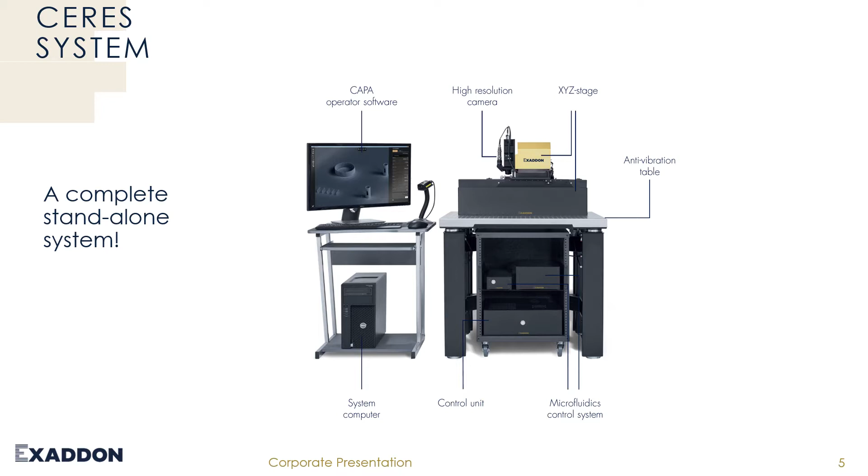We have the microfluidic control system and control unit underneath, which controls the printer, and we have a system computer and a proprietary developed software, which I will explain on later pages.

This cantilever is mounted on a plastic holder, a white square in the middle, and it ends up in a reservoir. The reservoir is the place where you put in the liquid you want to dispense. The reservoir is then mounted to a tubing system coming from the left side. When you apply air pressure on the tubing system, the pressure pushes the liquid through the channels, all the way through the cantilever to the aperture of the pyramid on the bottom part.

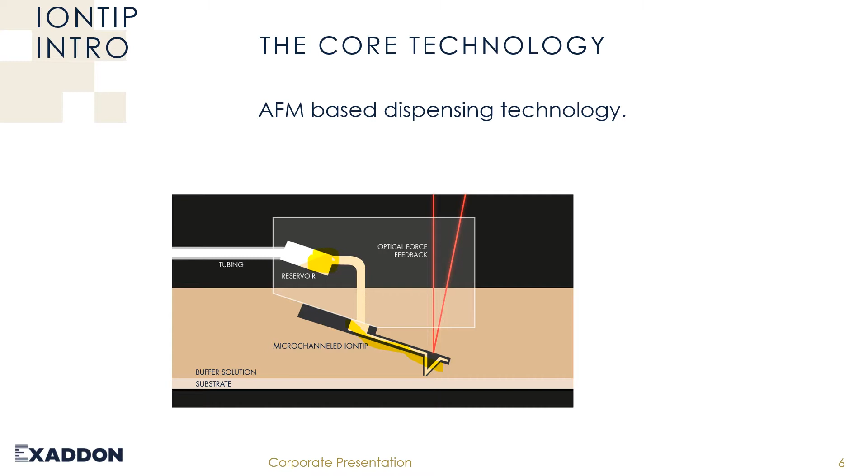So this is the micro dispensing core part of our technology. In the pictures, in the middle, there's a pyramid - this is how the aperture looks. There's an opening of 300 nanometers, a tiny small opening, which allows deposition of liquids in femtoliters per second. A femtoliter per second is about 1,000,000 times smaller than what the best flow sensor can detect.

So it's really small. In the top slide you see how the cantilever looks from a top angle, and in the lower picture is a schematic of the pyramid.

This one is how it looks in real, so it's a consumable, we call it iontip. Everything on the printer is built around this iontip basically.

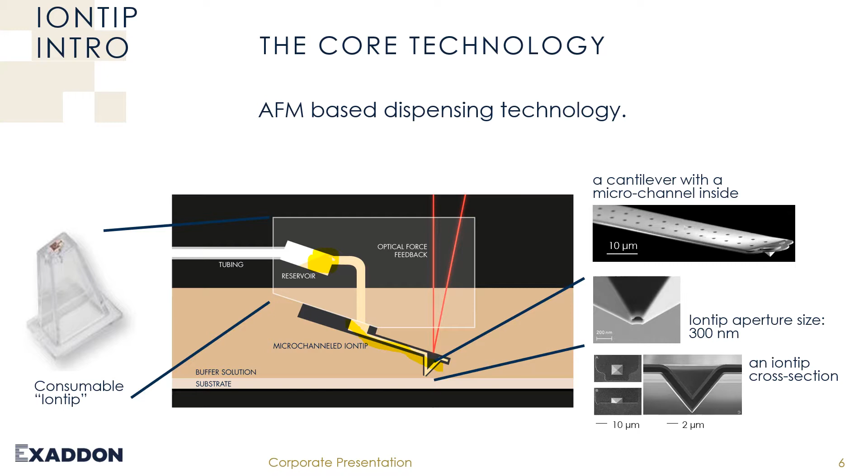Let's move on a little bit to the printing process. So here we see the electrochemical cell, so how we print, so what is the process behind.

Again, there's a cantilever, I highlighted here, this is a cantilever, there's liquid coming out, it's getting pumped out or pushed out of the cantilever to the aperture, and we are pushing for this 3D printing an ion containing liquid, so a metal ion containing liquid out of this cantilever.

Everything is in a liquid bath, so it's an electrolytic bath, so you can imagine there is a water level, which is a conductive bath basically. And we have also a counter electrode, a working electrode, and a reference electrode inside, which provides the current for reducing the ions which are coming out of our liquid to solid atoms.

So basically we are pushing the metal ions out of this opening, and due to the potential we apply between counter electrode and working electrode, we get the energy to reduce these ions to solid atoms.

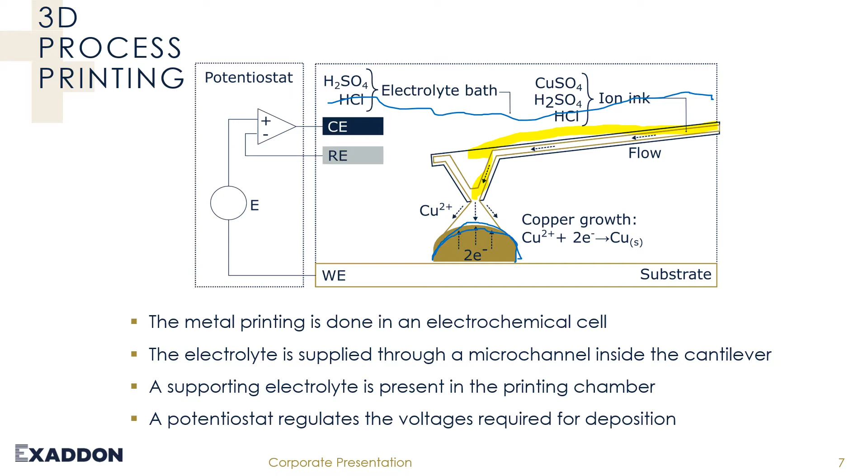And this happens now in the middle. You see this little dot in the middle. This is called a voxel, and a voxel is a volumetric pixel, like a 3D pixel, so to say. And we are building objects with this so-called voxels. To summarize it, we do basically electro deposition, very local and very specific, in very specific areas and controlled.

From the printing process, again, you see here the voxels, so voxel number 1 and 2, you can print next to each other, you can make gaps, you can make jumps, you can print above each other, you can also do like from 4 to 5, you can make overhangs of 90 degrees with aspect ratio of 100 to 1, so you can go really far to the side without needing any kind of support structures.

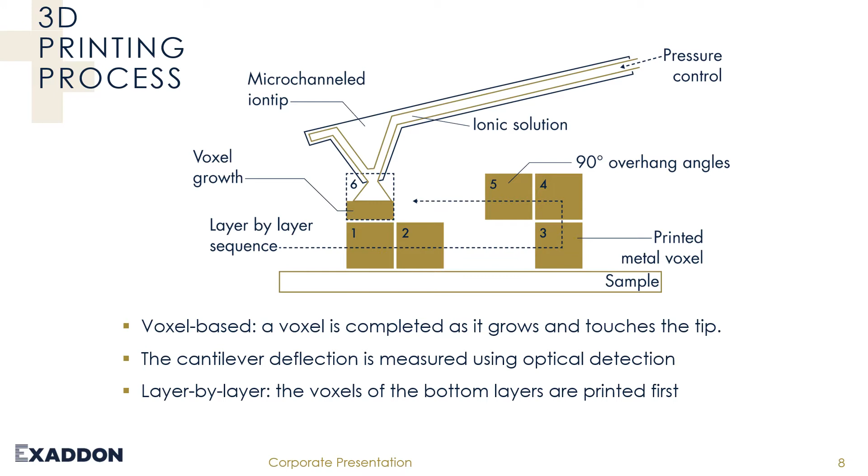So pretty much this is the process we have, voxel by voxel and layer by layer. So we are starting on level Z0, and then we build always in plus Z direction our structures upwards.

And this allows us now to print objects as small as 200 nanometer pillars up to 1 millimeter objects, so 1000 micrometers. The nano pillars, we ended now at 200 nanometer. We are not following this path right now, but it might be even smaller, but 200 nanometer is what we achieved so far. And we can also print up to 6 voxels per second.

And the voxel itself can vary in size, in diameter, and in height. So the volume we print over time can also vary. And now we can also change the pressure on the fly, which allows us to print small voxels and also big voxels in one object if required.

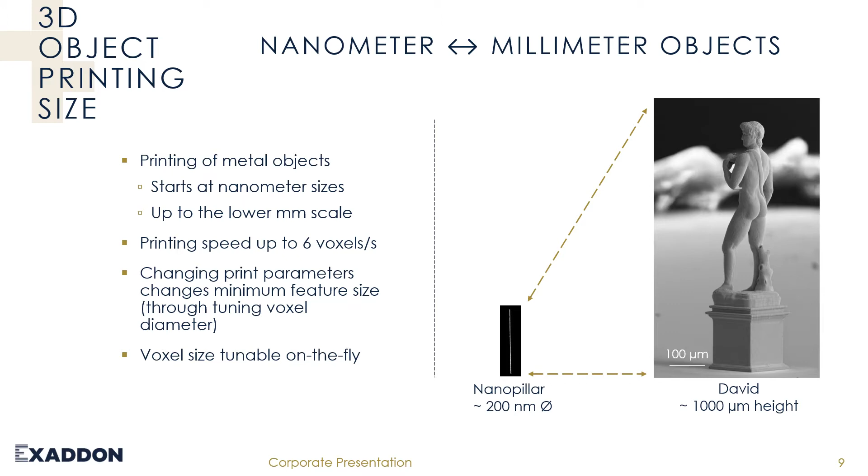And ceramic glasses, they use basically abrasive methods for producing their parts, so it's a little bit different than the others. Polymers, they use two-photon polymerization, most likely, which is quite common right now. Nanoscribe, you probably know as a company, they are well known. They have been on the market for about 12 years, and they were the first to really bring a system to the market.

Now they have quite good competition from UpNano, for example, from Vienna. They have a very interesting system and different approach, and Multiphoton Optics as well from Germany, also competing in this 2-photon polymerization market.

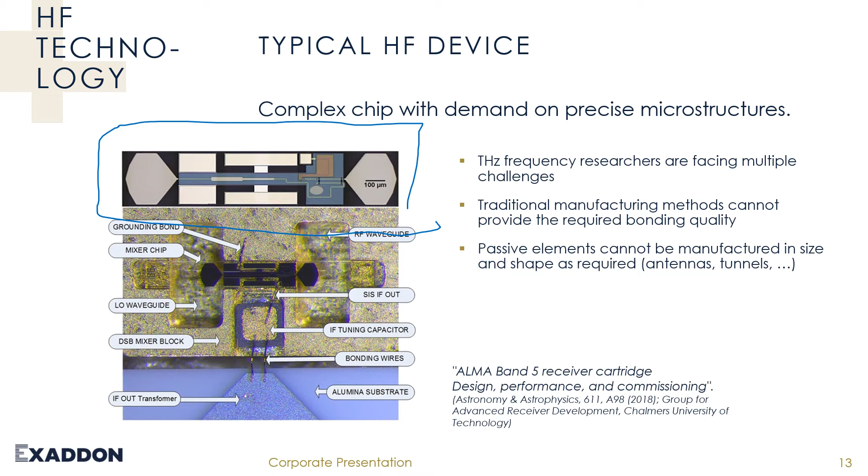So this is one field where we can use our printing technology.

Another similar application of wire bonding - it's not so much about surface, but about having interconnects which are shaped and designed, because interconnects like wire bonds make noise and disturb signals.

The shape of the wire bond can only be very limitedly adjusted and defined with the wire bond system. You just know it starts from one point and goes to another point, but the exact shape is not very clear.

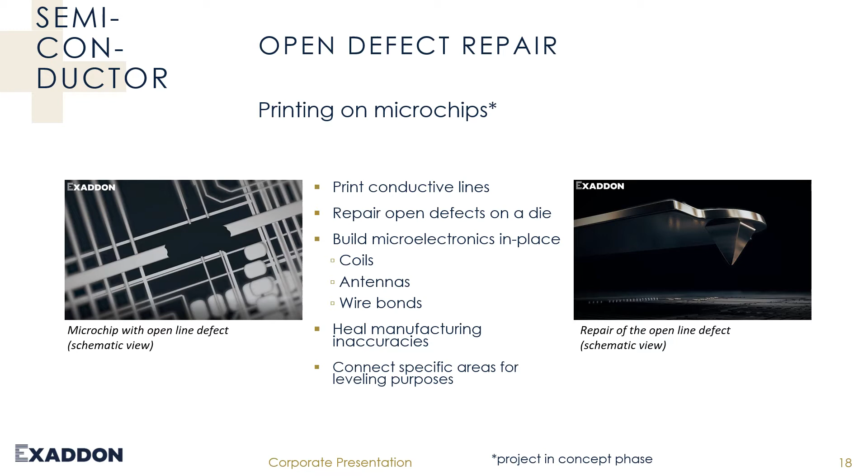Also, the next topic is not only repairing open defects, but also connecting specific areas to level a chip. After manufacturing, when a chip is made and tested with probe cards, potentially it's not leveled well, and you need to balance it a little better, or level the whole chip better, adding certain parts to the circuit of the chip - and there we can make the connections to these circuits. So this is a nice project as well.

Microelectronics and industry. We developed this part with a French customer of ours, Axon'. They came with the need for smaller plugs, micro plugs. On the left-hand side you see the 1.8 millimeter plugs with gold wires - twisted gold wires. It's the SEM image, and next to it a little gold arrow, a little gold bar - this is the size they would like to have, only 500 micrometers in height.

They delivered the CAD model to us, which you see in the middle picture. And what we did, we printed it. Next to the CAD image, you see the 3D printed object is exactly what we achieved by printing this CAD model they requested. On the right-hand side you see the plug as a demonstrator, a future product from Axon'. The plugs we print there - the only possibility to produce them is with our additive manufacturing technology.

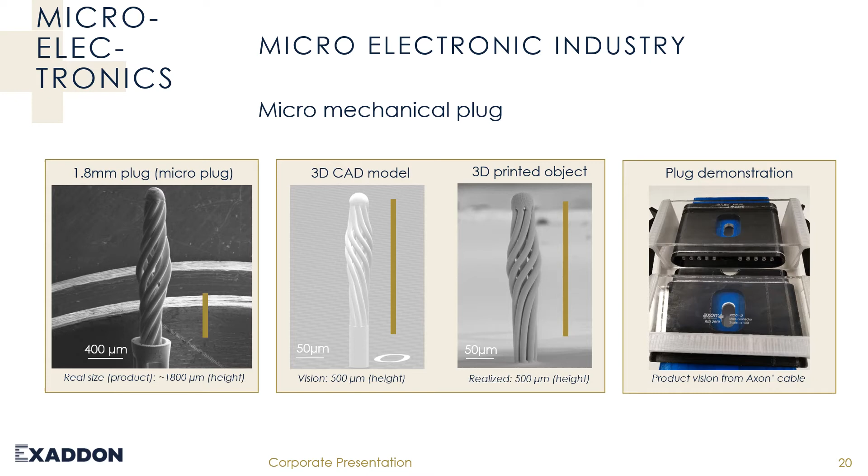Fundamental research and material science is also definitely a very interesting topic for us, and especially for our customers. Here you can see the lattice, which is scripted on the left hand side, and next to it you see the printed lattice, so it looks pretty much exactly the same.

Very interesting here, as I mentioned before, horizontal printing is necessary for making these objects possible. Here we did a lot of horizontal printing. You can see all the beams, connected with vertical beams and banded beams, and all of this made this lattice possible in a very, very small scale and in metal.

So we are the only one with our micro additive manufacturing technology which enables our customers to print metal lattices for their material research. We also made a test, like the spring constant test, with a tool of the company Almenis,

executed by the Institute EMPA in Switzerland. And you see here the spring forces, which we took of copper. It's not the most interesting thing you can see, but you can see especially here the connection of the one voxel to the surface where we start our object.

So we start the object printing with one voxel all the way up to the platform, and it's very strongly connected. This means also we have very good adhesion of our printed object to the existing structure. The adhesion forces there are very strong.

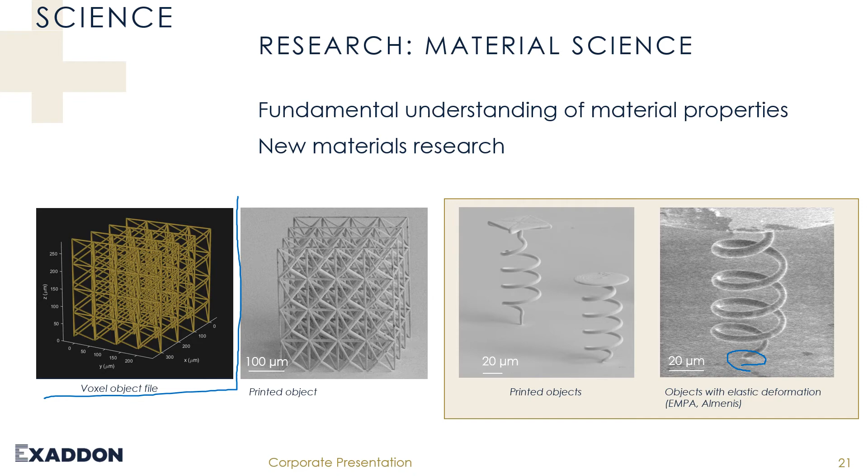Here, just some more pictures of objects we printed. For example, the pillars, different pillars in different diameters. One thing to explain: in the middle pillar, I try to make here some voxels, so it's printed with one consecutive line of voxels in Z direction, and the voxels have a certain height.

And assuming now the fat boy here, they also have these voxels, just the diameter of the voxels is larger. Assuming the height of these two voxels is the same, the printing time would be the same. So this is just information for giving a better understanding of printing times.

Printing time varies definitively with the volume you want to print. So you can print higher volume in the same time, or you can print higher precision in the same time, as you request.

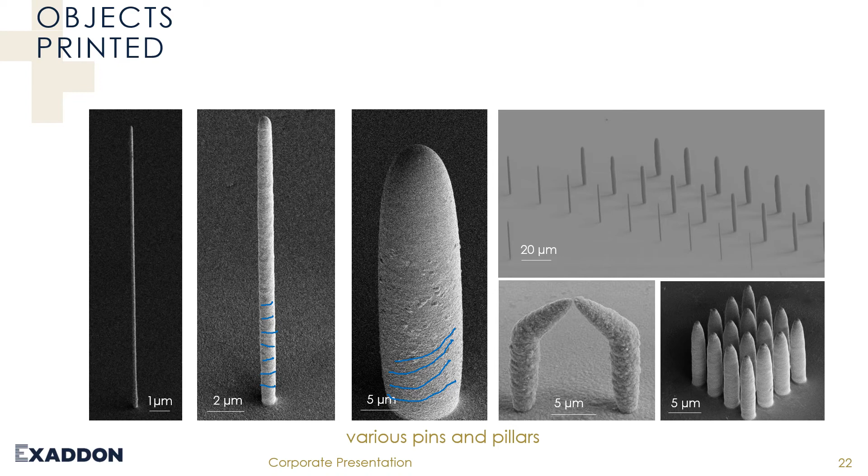Here just some flat coils we printed, and some coils and springs and flat coils.

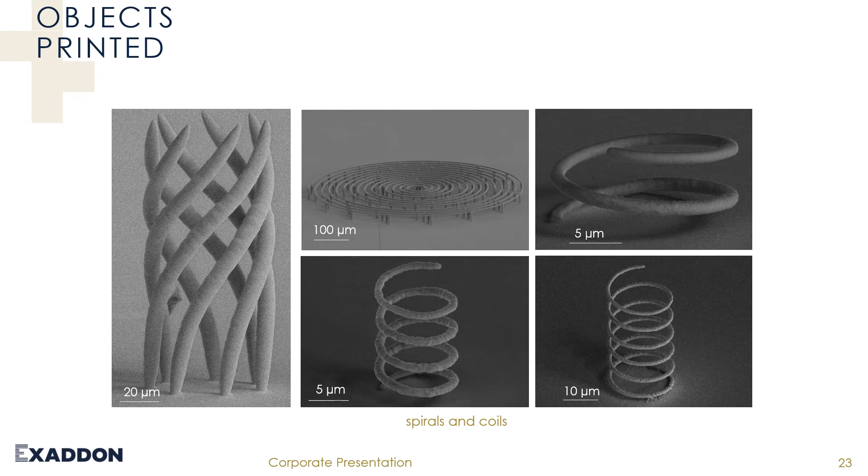Then more complex structures. This one we did print with different pressures, so we could generate different voxel diameters for this object. So all quite complex structures, and you see the scale bar on the bottom part. It's really tiny, around the diameter of a human hair, and to print complex structures like this with other technologies, it's just still not possible.

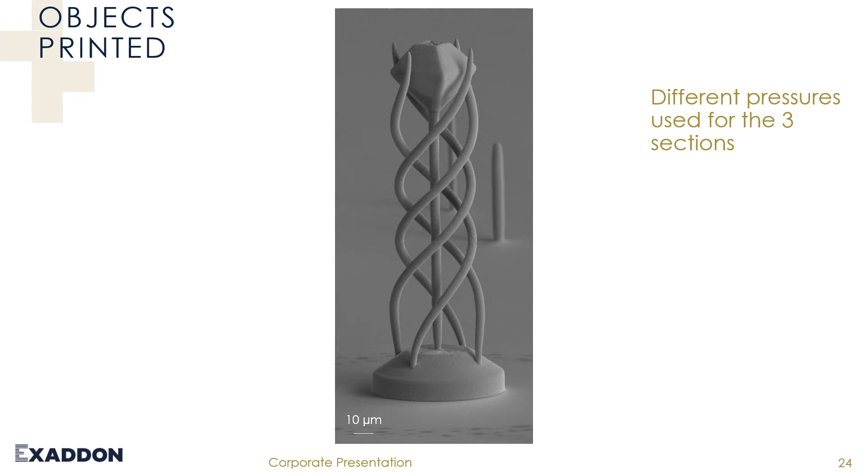And here a nice overview showing that you can also load many objects in the printer, and you just consecutively print them over time, overnight, over a longer period, and you get many prints. You just feed the printer and it follows your print request.

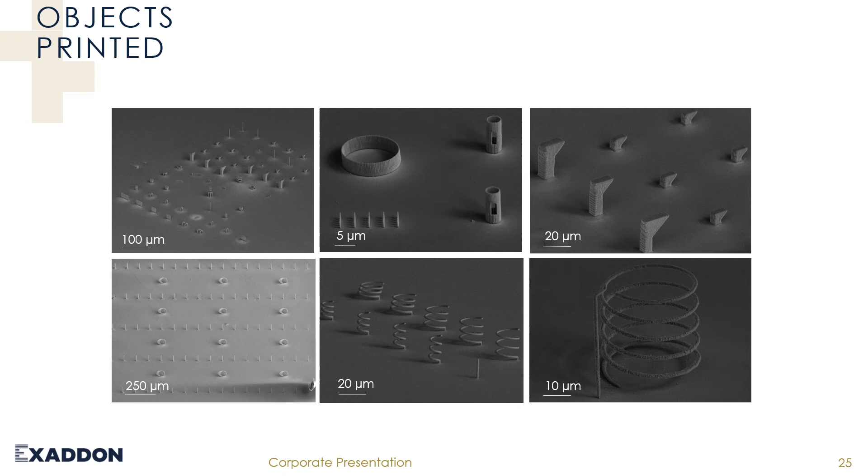Now we are coming to the video which I promised you. Here I will show you how the system looks in real life, not only in pictures. We are starting a little bit with a system overview and moving on.

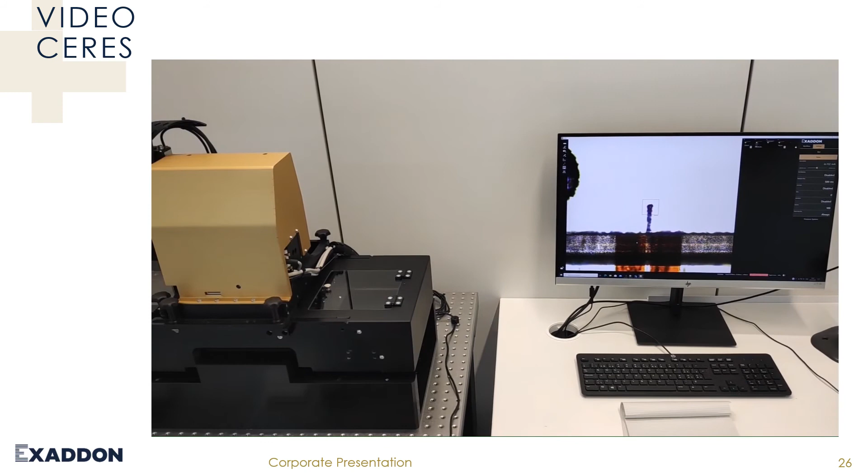Here we go, this is the desktop, then the printer, this is the Z stage, XY stage, anti-vibration table, and the peripheral areas below, the aggregates.

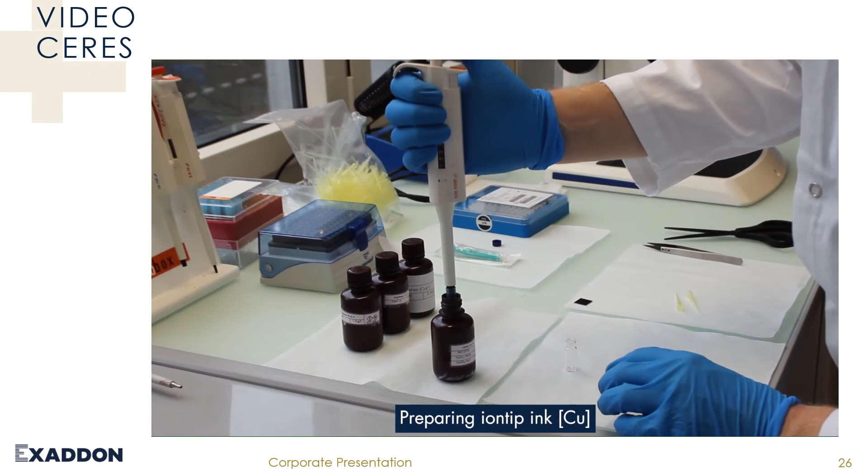Then now we're starting how to prepare the printer. First of all, we need an ink, the print ink, the metal ion containing liquid. All chemicals can be easily handled, and we also have full instructions and guidelines for our customers.

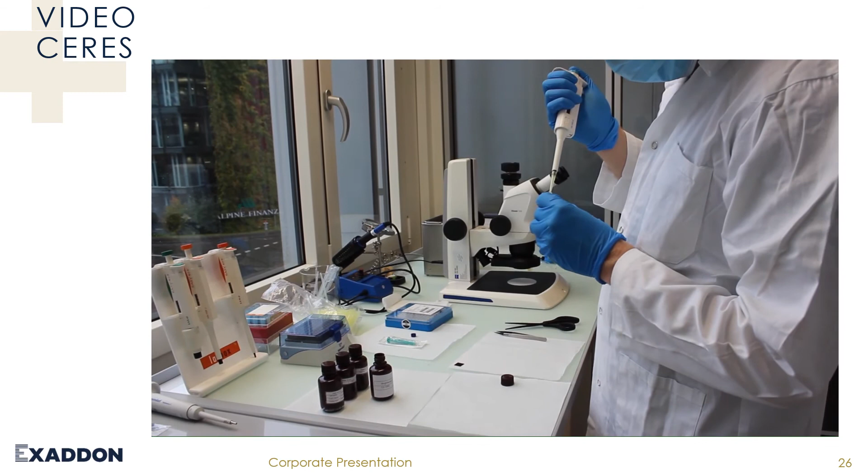So here we are preparing the little volume for printing.

Here we are assembling the printing chamber. This has to be done not every time, but maybe once every few days when you clean the chamber. The chamber is ready for two substrate sizes, 15 by 15 millimeter and 25 by 25 millimeter.

Customer versions of the printing chamber are also possible. The space is defined, and you can build your own customized printing chamber inside if you want.

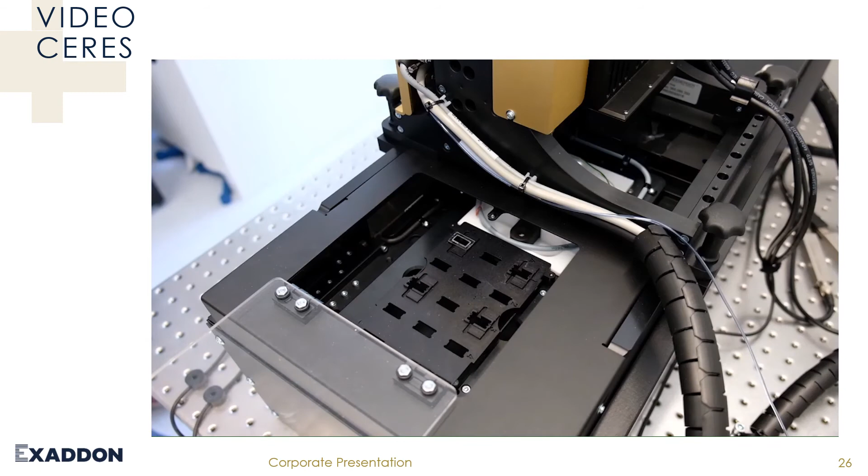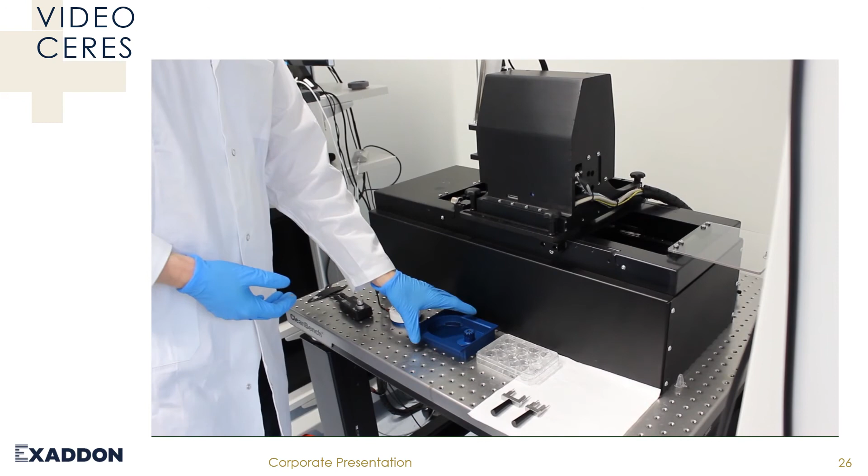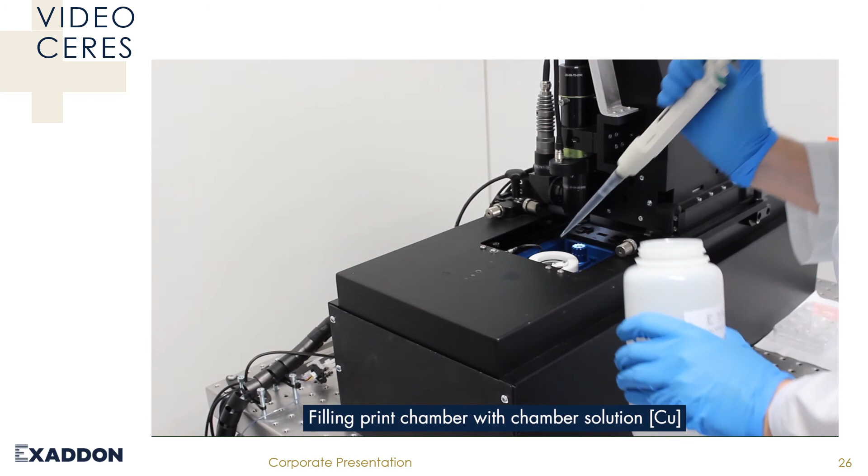Here we already installed the printing chamber. We are refilling the electrolytes, the electrolytic bath, into the printer.

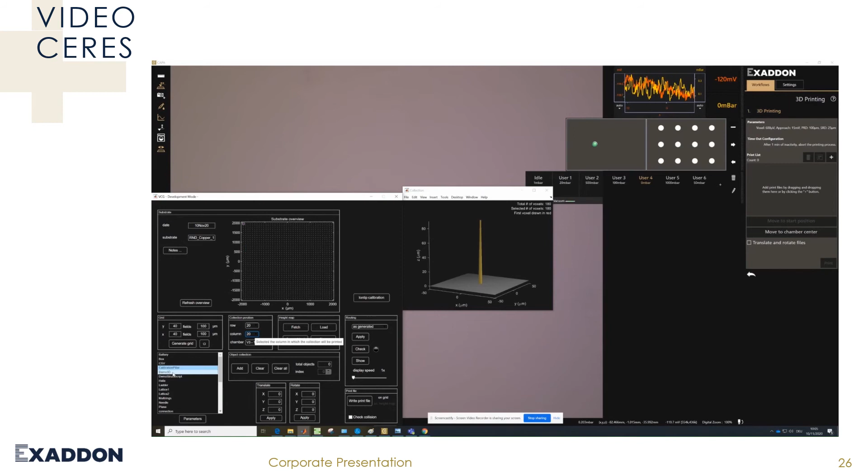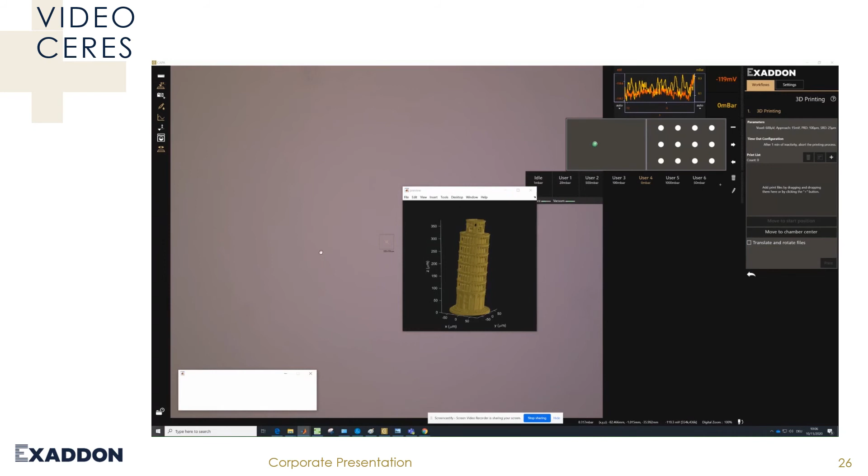Now I would like to explain a few slides about the printer software. Here on the left hand side is VCG, Voxel Cloud Generator. It's a MATLAB based software fully developed by ourselves, used to load structures and to define things like voxel distances and voxel heights, and where you want to print your structure. You can load pre-existing structures, like this Pisa tower, if you have the file, and then place it exactly at the position where you want to print it.

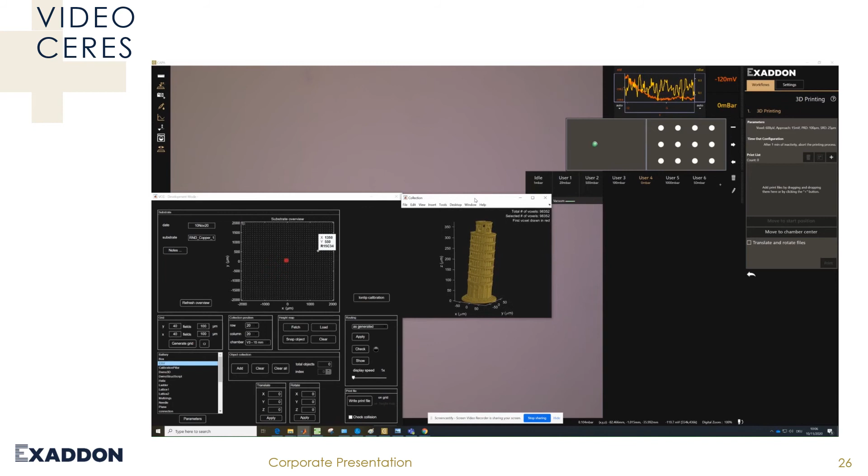In this case, we are printing this Pisa tower right in the middle of the substrate. Here you see the red point where it will be printed, and how it looks with the top view camera. We then save the file, and the 3D coordinates are fixed.

We use the CERES software, the printer software, to upload the files we want to print. For example, this would be the Pisa tower, or potentially a pillar or whatever you want. You can print multiple Pisa towers next to each other, uploading as many as you want to the system.

Now we are in the printing process. You see on the oscilloscope that we are already printing.

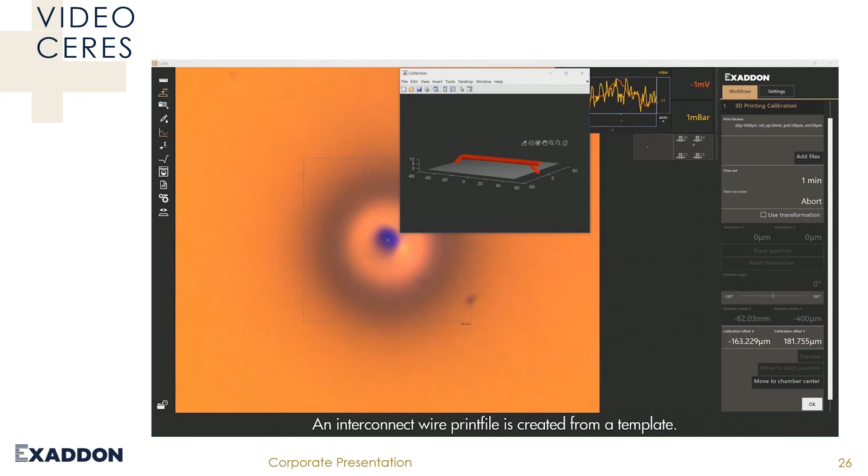One more example is how we print on existing structures. So we choose this red object, this kind of bridge. We load it with the Voxel Cloud Generator, save it, and now load the file into the CERES software, which happens here.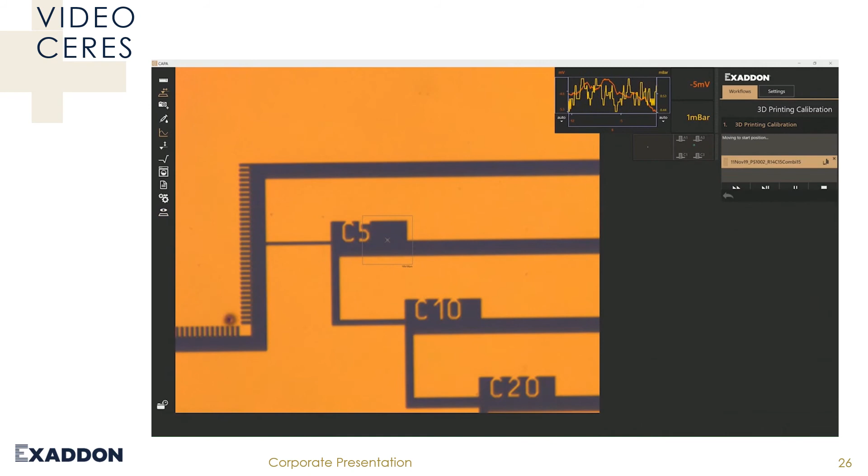Now you see a structure of a specimen, a test device. This is the bridge from the top view. We move it exactly to the position where we want to print, and shift it by 90 degrees because we want to bridge from the top to the bottom here, as an example. So we place the object exactly where we want to print, and start the printing.

After printing, here we go, the printing is done, and we see the SEM image from the side. It was printed exactly like the objects intended, on top of or as a bridge between these two parts of the testing device or specimen.

Ceres is important because it makes possible printing and additive manufacturing of metal structures not possible with any other technology so far. It's a hugely versatile system that can be used in many different use cases. We can print metals, different metals, and we are working on different metals as well. It can also be used for dispensing other materials, polymers or other liquids, not necessarily for 3D printing, but maybe for line printing and 2D printing.

We also encourage our customers to develop their own customizations. We want them to grow and go further and become better. We also support our customers by helping write new publications.

A few more aspects of why we are mature: we have ongoing research collaborations with leading institutes, and a full supply chain in place. We've seen the software, which is already very mature. We have a support and ticketing app for customer requests, so if you write something you get a ticket number, and we reply until it's solved. We've also extensively tested inks and products for optimal print results.

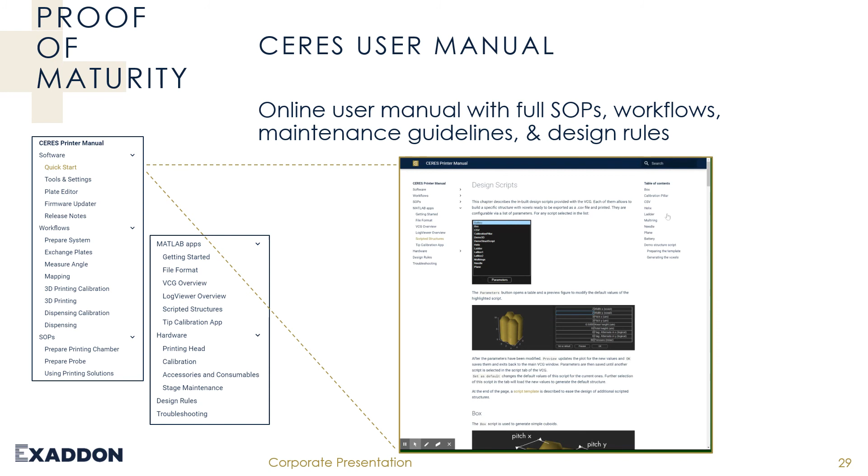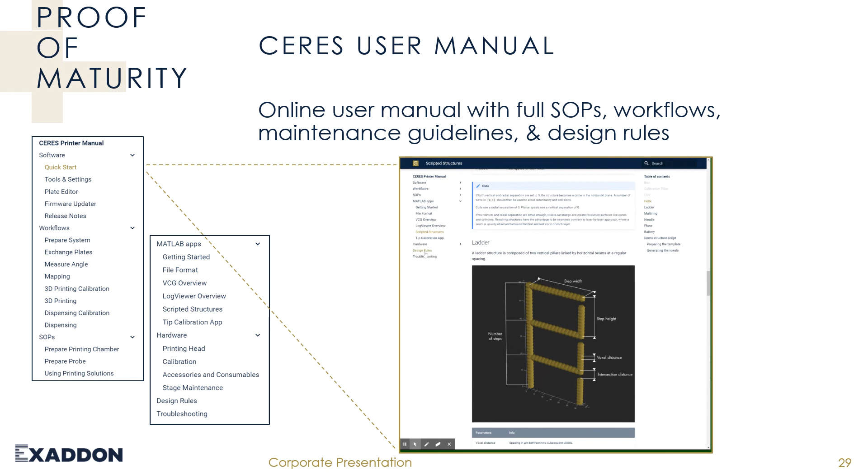If you want to script structures by yourself, in some cases it's better to script structures than just to slice it. It's also explained here what is important, what parameters you should set and use. So it gives you really deep insight into the printer.

Again, printing head: how you maintain it, how you assemble it, how you install it if needed. Maintenance package: what do you have to do? How do you have to clean it? How do you have to grease it? So like that you have a well-running system over time.

It's important that you also have the ability to keep this printer on a very high level, because everything is so small, it has to be highly accurate. We have design rules for the printing chamber, in which parameters you should set your voxel diameters, heights, to get better, good results.

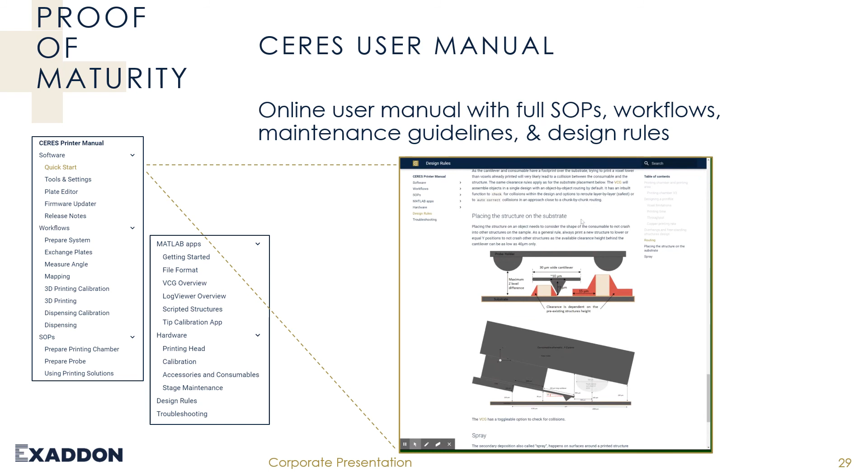Here are the insights about the probes, the ion tip. So what are the geometrical limitations? We try to be as open as possible and explain and give you all the needed information you need to be able to run the printer on a very professional level.

Of course, the last chapter is troubleshooting. Whenever we find something new which can occur, we write it down so that you are able to run the printer smoothly by yourself, and keep on developing.

We're releasing copper products and after-sales items, so everything you need to print copper in high quality is available. You can either purchase prints from us if you want the print inks, or you can also develop your own.

We are finalizing gold products right now, so that our system is able to print gold at a very high quality level. We're also developing nickel as a print material, which will take a bit longer. This has magnetic properties and can be used for magnetic applications. It's a hard material, with high Young's modulus, high yield strength, etc. This is different from copper, which is very conductive, or gold. So it's a material for different purposes.

We are testing with Empa and other universities, writing papers, and we are continuously improving our technology and the software we release to our customers for free. So yeah, we keep on going.

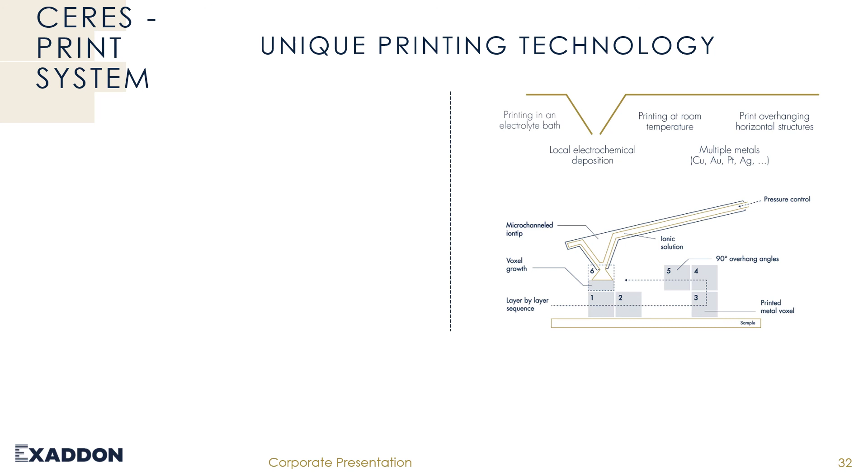At the end, this is a print process: printing at room temperature, local electrochemical deposition, multiple metals, overhanging structures. This is how the system looks like. It's definitively a system for innovators and visionaries in additive micromanufacturing.